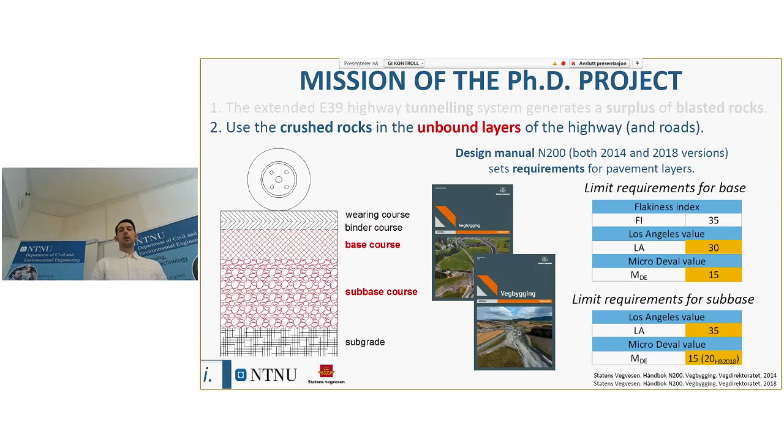As a preliminary stage to this research, it was important to understand and have an idea about the geology and which kind of rocks we can expect to find along the E39 trace alignment.

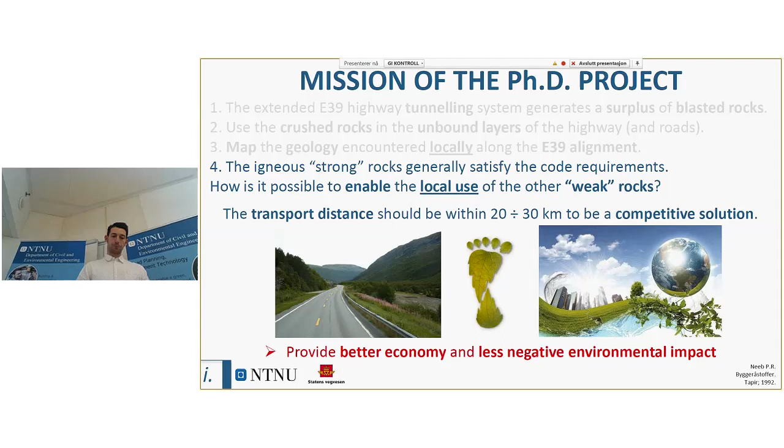So the basic question for our research has been how is it possible to use these weak rocks, and of course use them on a local basis, avoiding a transport distance, avoiding any excessive transport distance.

So now I would like to highlight, or remember, that when we are dealing with rocks, or also called 'pukk' directly in Norwegian, we need to keep in mind that we have two mechanical properties: the first is the stiffness, or resilient modulus, and the other is the deformation. Both stiffness and deformation are dependent on several parameters, the most important being the stress level and the water content, and afterwards the density, the grain size distribution curve, and the geology.

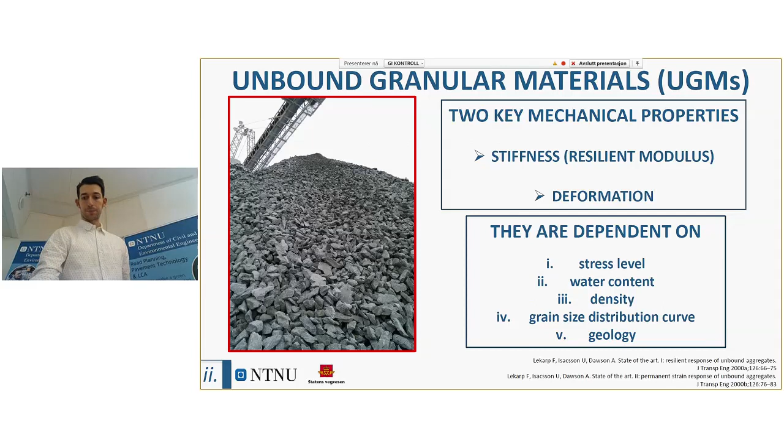So regarding our research, we have been considering this input. For the stress level, we have followed the stress path suggested by the European norm. Regarding water content, we have investigated two water contents: the first is 1%, and the other has been 5%, that is the optimum moisture content. For density, we have been using compacted samples, compacted for 30 seconds. The grain size is a distribution curve.

During the PhD, we have been studying a typical base layer, corresponding to this dashed line. And regarding the geology, we have collected 4 different types of rocks that lie along the E39 alignment.

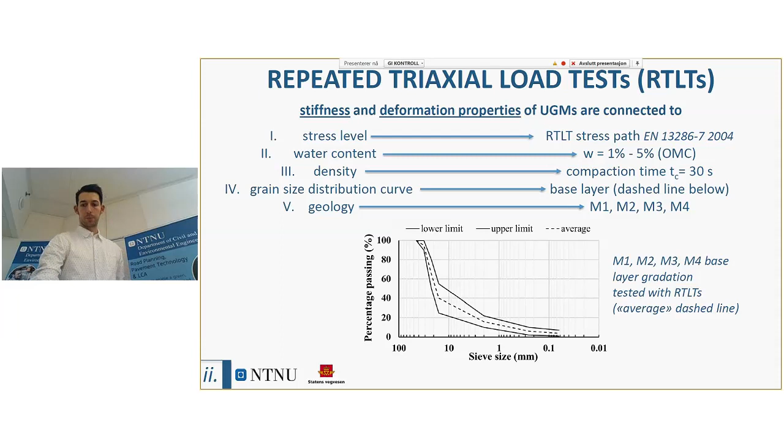So we have been doing several tests in the laboratory using the repeated triaxial load test apparatus. The key idea behind this apparatus is to provide our specimen with a stress level which is similar to the stress level likely to be encountered in real life during the real life of the road.

So the specimen is composed of our crushed rocks. The specimens have been compacted, then put inside the apparatus. There is a membrane that you can see here, and afterwards we fill this chamber with water, so that the water surrounds our specimen. What's more, we can adjust the pressure of this water, so that we can adjust the triaxial or surrounding pressure.

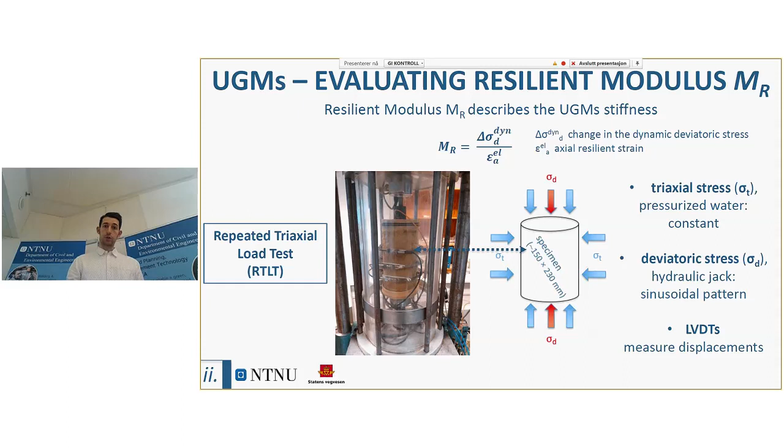As mentioned before, we have been following the stress paths suggested by this European norm. According to this stress procedure, called the multi-stage low stress procedure, we have been considering first and foremost 5 sequences of stress, that is to say of triaxial stress. Each sequence corresponds to an increasing value of triaxial stress, and this is why you can see 5 different colors here in this curve, so that every curve corresponds to a different triaxial stress.

In addition, for each sequence, it has been possible to adjust the deviatoric stress provided by the hydraulic jack, so that each sequence in turn is composed of 6 steps. This representation is actually equivalent to the table described before, that is to say, the stress paths provided by this European norm.

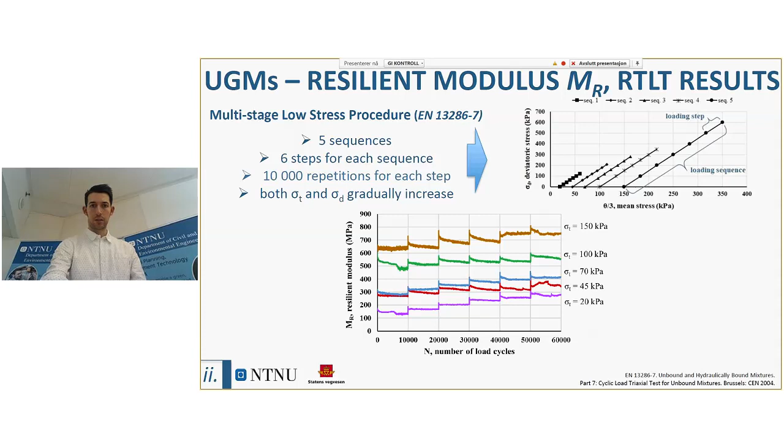Of course, we get a lot of experimental data out of this experiment, and we need to be aware that there are some models we can use to interpret the data, and here we can portray some of the most famous or most important.

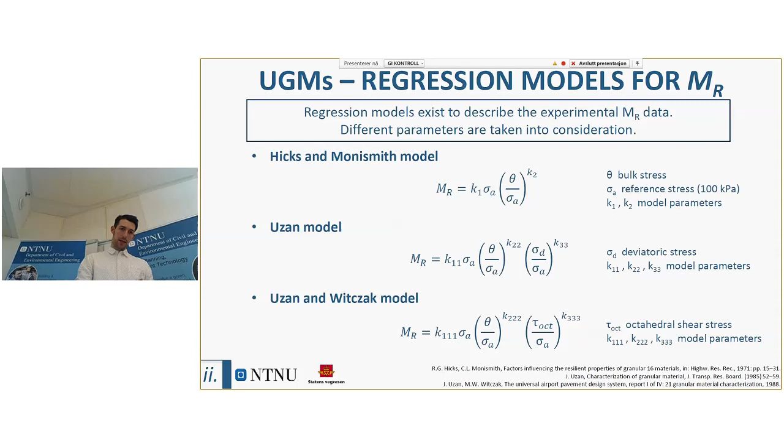The first one is the K-theta model, where we have a connection between the bulk stress and the resilient modulus. We also have other models like the Uzan model and the Uzan-Witczak model, other models establishing a connection between the stress levels and the resilient modulus. These models were developed some years ago, but they are really reliable when it comes to describing the experimental data in a good way.

The other important mechanical parameter I mentioned before is, of course, the deformation. As experiment engineers, our goal is to look for materials that have the best deformation properties, in the sense that the residual deformation, which is responsible for rutting problems, is as little as possible.

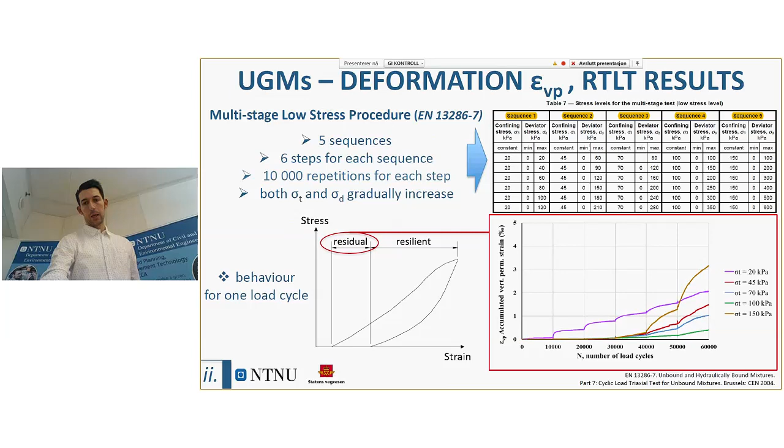And actually it is possible to understand these properties very well with the Tri-axial test as well, and we also have some models that we can use to interpret the data.

During our research, we have been considering the Coulomb model. The idea behind this model is actually simple: if the permanent strain rate is low enough, we are in an area that can be considered elastic. If the permanent strain rate is too big, or exceeds a threshold that we have defined, then we can consider ourselves to be in the failure zone. Otherwise, we are in a kind of middle zone, that is to say the elastoplastic zone.

Again, as pavement engineers, our goal is to keep the performance of the road in the elastic zone as much as possible.

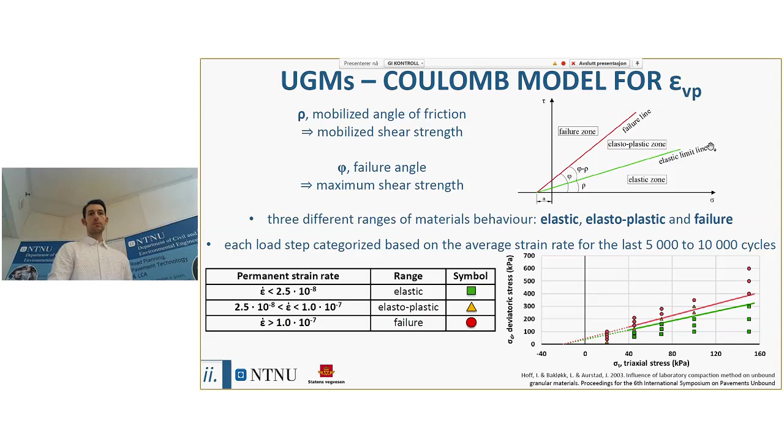As well as for the resilient modulus, we also had some models regarding permanent deformation. The first two, the Barksdale model and the Sweere model, establish a connection between the number of repetitions of the load provided by the vertical hydraulic jack and the permanent deformation. We also have other models, like the Hyde model and the Shenton model, which provide a connection between the stresses and the permanent deformation.

I would also like to mention that more complex models combining the number of load cycles and the stresses are available as well, but we haven't considered these models because the ones we used have been sufficient for us to investigate the crushed rocks and, what's more, to understand that the use of some additives, which I'm going to talk about later, has been effective.

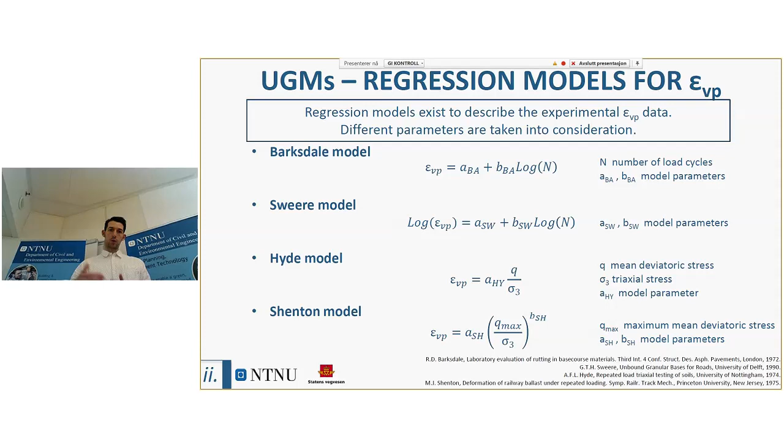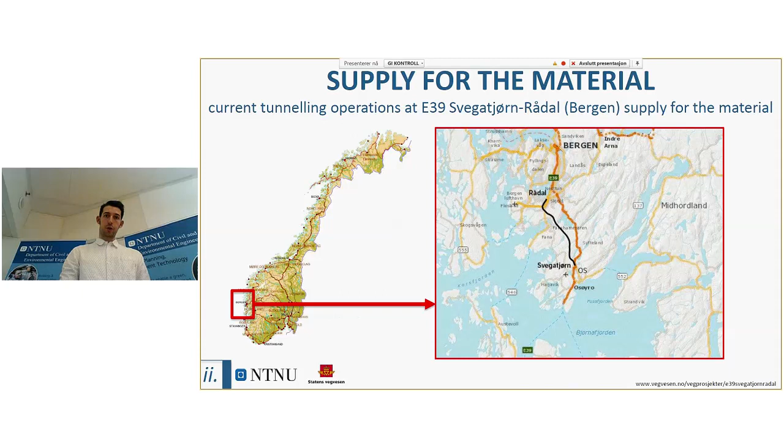So now let's move on and talk about how and where we got the materials we studied during our PhD. We went close to Bergen, to the Statens building site, and while we were there we collected three materials. Material M1 has an igneous origin, while materials M2 and M3 have a metamorphic origin.

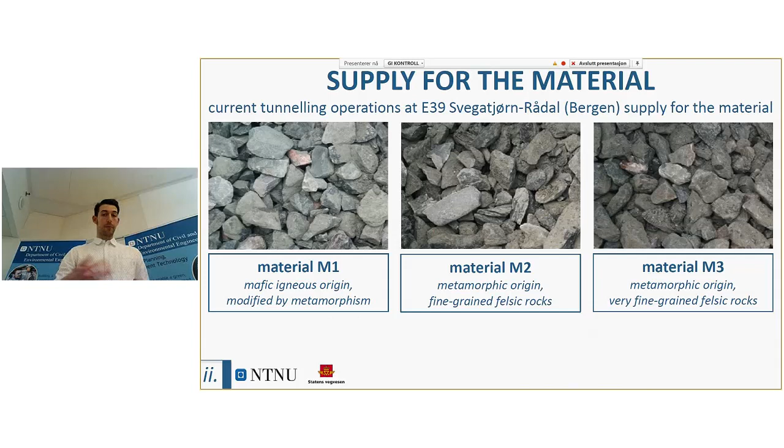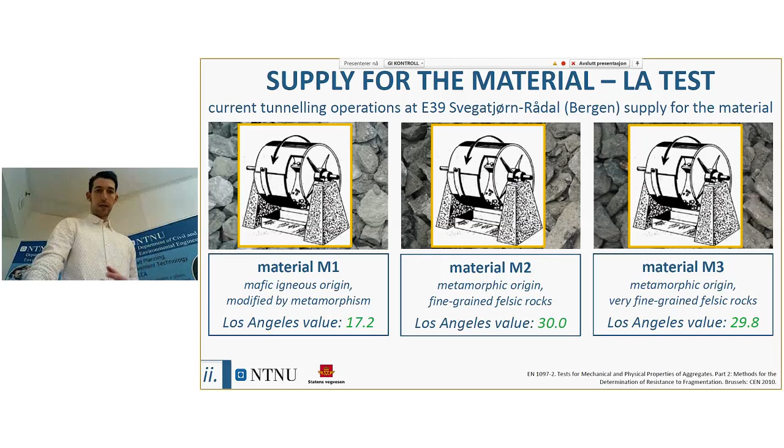The first thing we did was characterize them according to standard tests, that is to say the Los Angeles test and the micro-Deval test. As a result of these tests, we understood that material M1 was actually a good material, a strong rock that can be immediately used for pavement applications, while materials M2 and M3 are not strong enough.

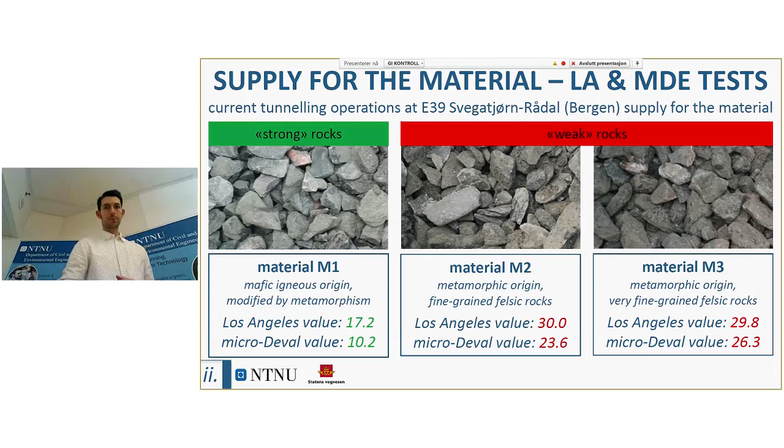So we need to find a way to improve the properties of materials M2 and M3 in order to enable their use in pavement construction. So our research question is: how is it possible to improve the properties of these weak rocks, which are not able to fulfill the code requirements?

So the first approach, quite simple from a conceptual point of view, is to mix the strong and the weak rocks, that is to say mix M1 and M2, or mix M1 and M3, and then see what kind of relationship we get. In this case, we got a clear linear relationship when mixing the strong and weak rocks, both regarding M1 and M2, and M1 and M3.

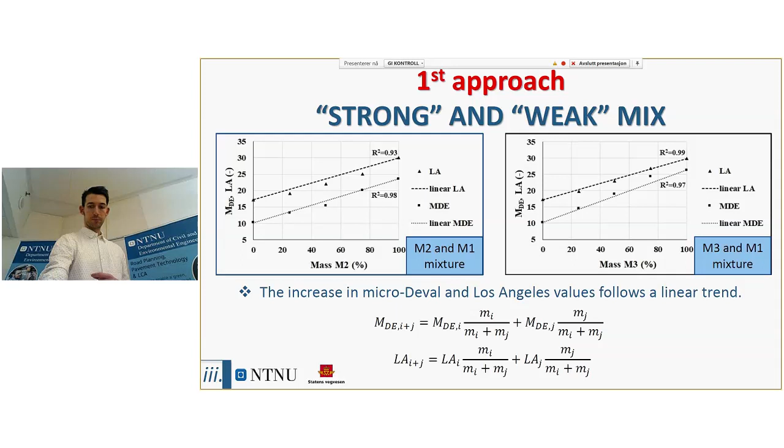Of course, the other way could be to use an additive. Today, when we talk about additives, we have some technologies already available, for example bitumen stabilization, lime stabilization, and cement stabilization, just to mention the most famous ones.

During our PhD, we have been investigating other resources, other additives that can be used, and these additives haven't been used that much, for sure in Norway, and anyway on a world basis. This is why it has been extremely interesting to investigate them. When it comes to these additives, the applications the literature pinpoints mainly refer to lime and silt. So applying, or studying the application of these additives to crushed rocks, is actually the novel content provided by this PhD research.

So let's start and describe the first additive that we used regarding the crushed rocks. The first one has been a polymer-based additive, and it is made of two components.

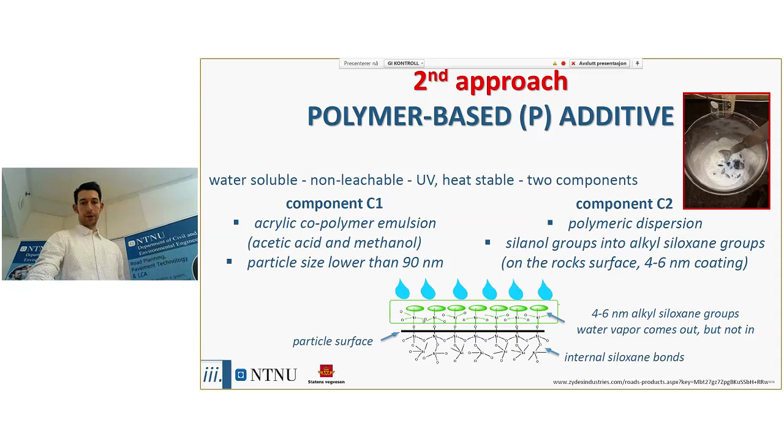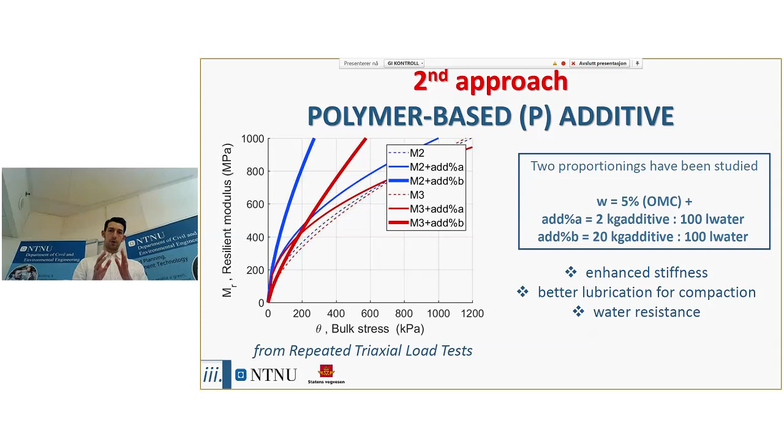So the first results in the laboratory confirmed that the use of this polymer-based additive was actually effective, and we also investigated the coating effect provided by the use of this additive.

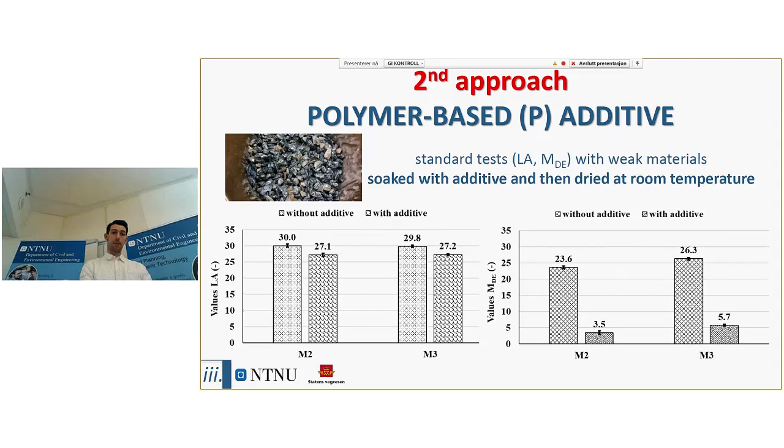We soaked the rocks with this additive and waited the necessary hours for the additive to properly bond on the surface, then we performed the standard tests, that is the Los Angeles test and the Micro-Deval test. As we can see from these pictures, it seems that these additives do have a beneficial coating effect.

The other additive we have been studying during the PhD project is the lignin-based additive. This additive is first and foremost a renewable product that comes from the paper industry. It is a non-toxic, non-corrosive polymer, and we need to remember that it is water-soluble, so we need to pay attention when using it.

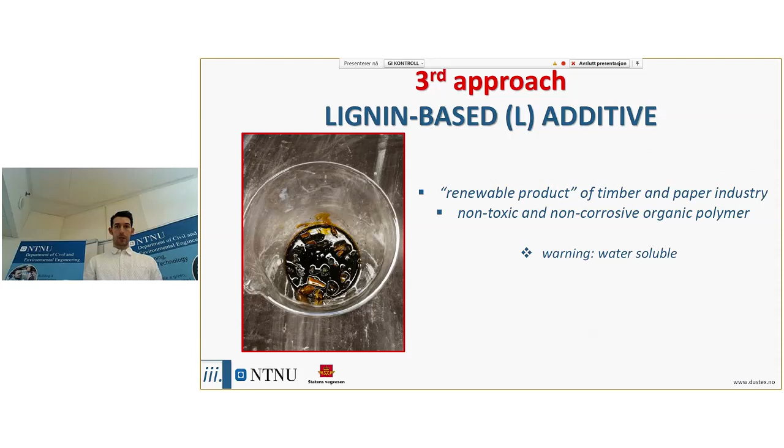Anyway, first and foremost, we made some preliminary investigations in the laboratory using the Tri-axial load test, and we could understand that the lignin-based additive had a beneficial effect, since the resilient modulus is higher here than the resilient modulus attaining to the rocks which were not treated.

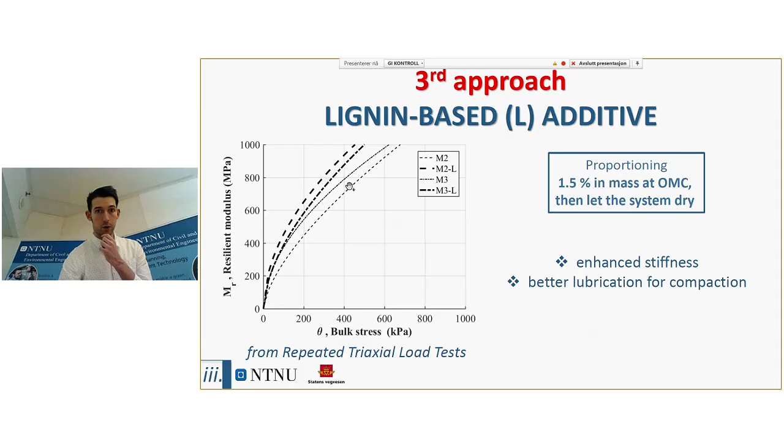Similarly to the previous case with the other additive, we also performed the standard tests, that is the Los Angeles test and the Micro-Deval test, after soaking the rocks with the lignin-based additive. The results are pretty clear: both the Los Angeles values and the Micro-Deval values decrease, so the additive does provide a beneficial coating effect.

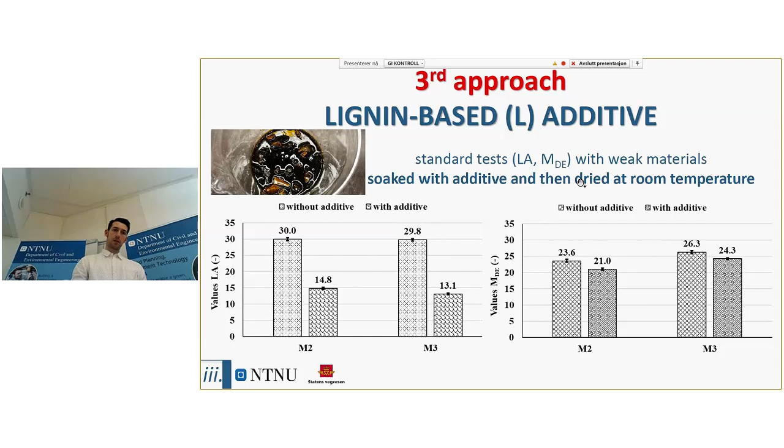As a further part of our PhD research, we wanted to make some modeling out of these experimental results. First and foremost, we tried to analyze and interpret this experimental data according to the models available in literature, the models I mentioned before.

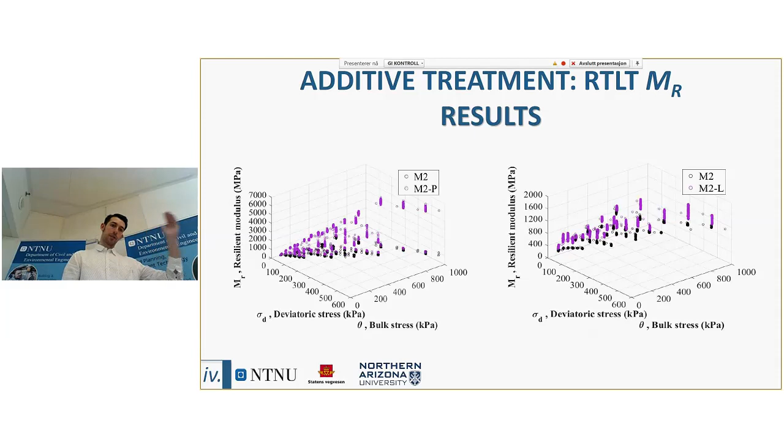Again, we can also plot these results in a 3D plot, and again the magenta colors, the resilient modulus corresponding to the treated materials, are actually higher than the resilient moduli connected to the untreated materials.

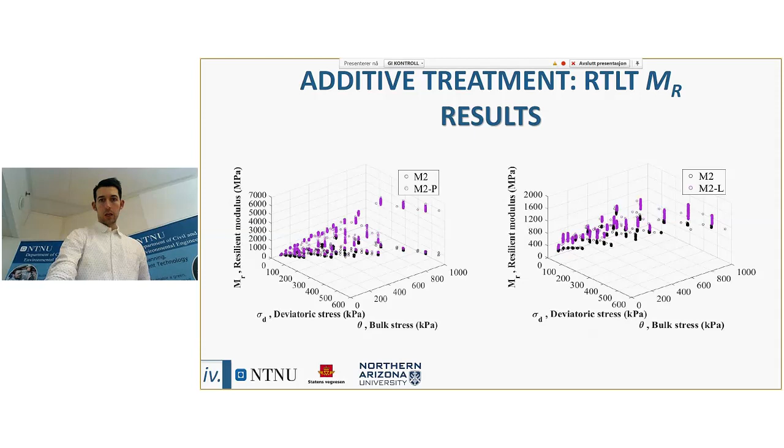As mentioned before, first we followed the Hicks-Monismith regression. Then we also displayed the results according to the Uzan model regression. Whether you're talking about a surface like the Uzan model, or a line like in the Hicks-Monismith model, it's always possible to see that the magenta color, the treated material, performs better than the untreated material.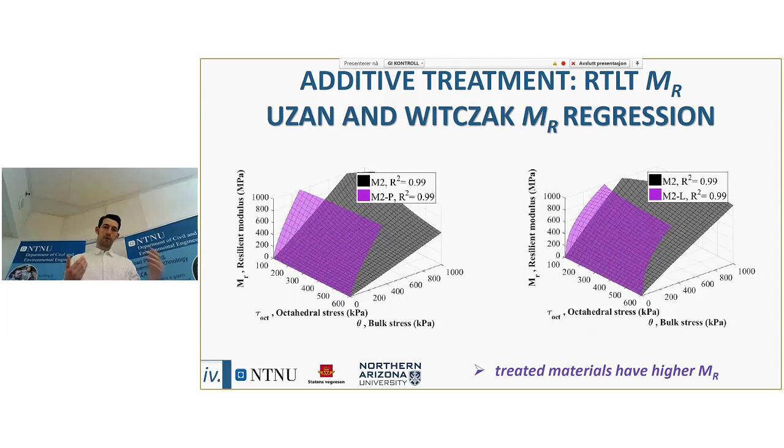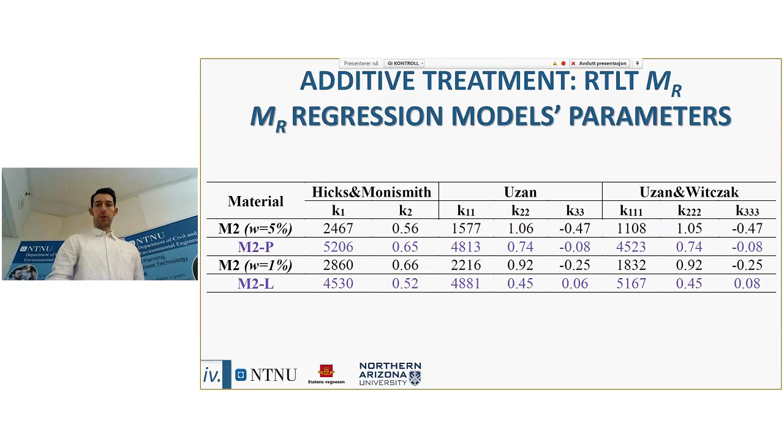Here we have some parameters just connected to the regression analysis. The other key mechanical property, as mentioned, is the permanent deformation.

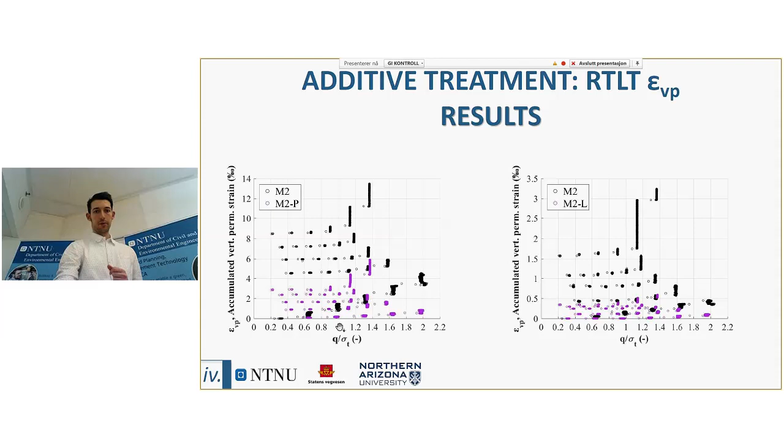Again, here first and foremost, we display the results coming from the experiments from the Tri-axial load test. Here we portray the same results, but with different values along the x-axis. For example, here we portray the ratio between the deviatoric stress and the Tri-axial stress, and here we portray the ratio between the maximum deviatoric stress and the Tri-axial stress.

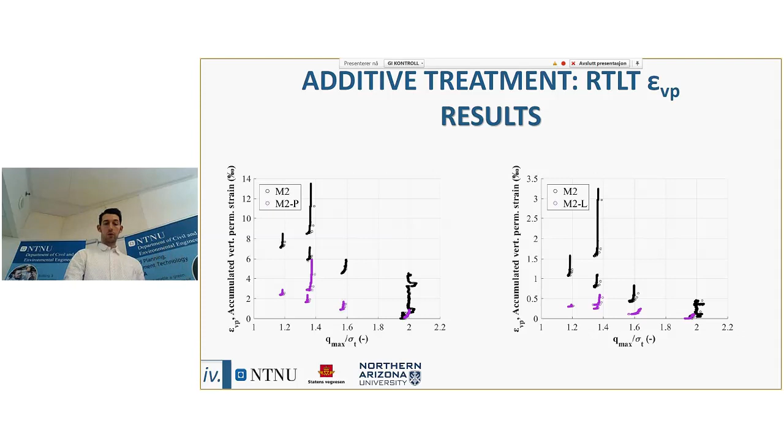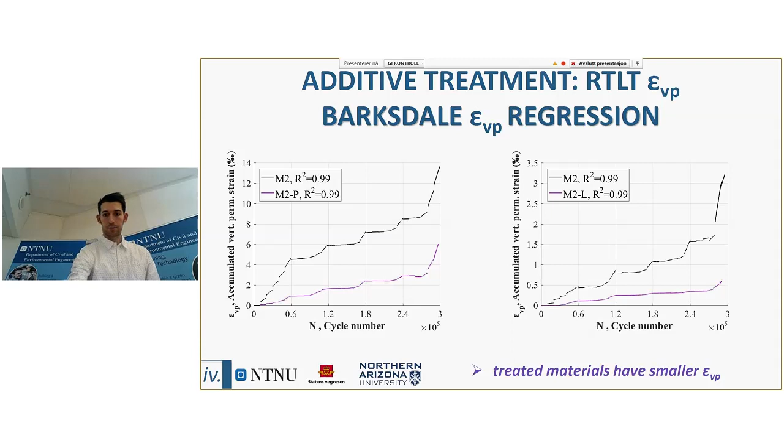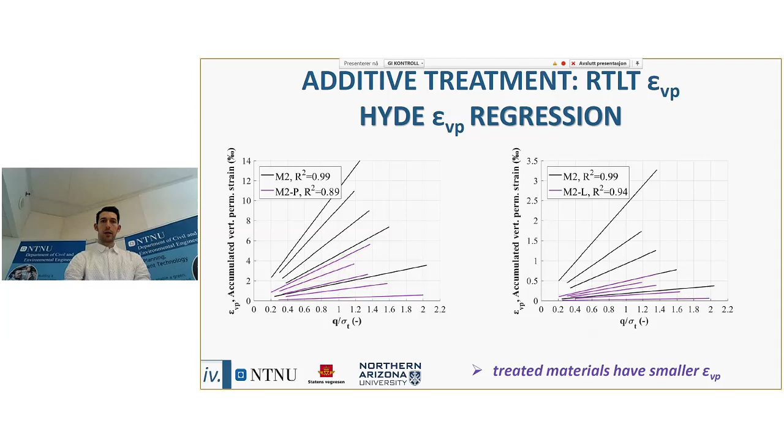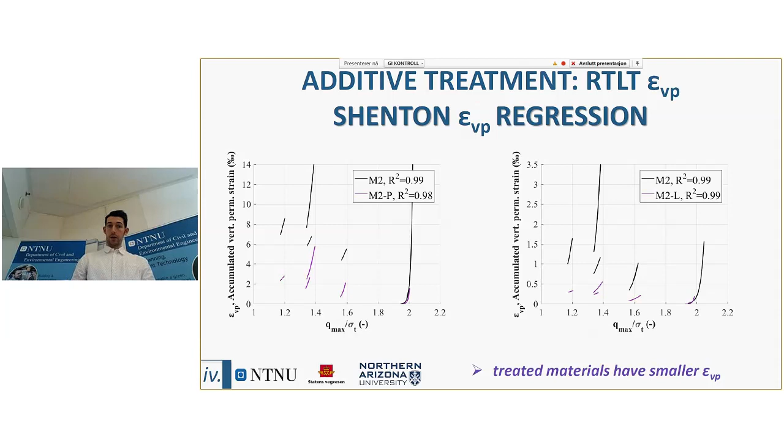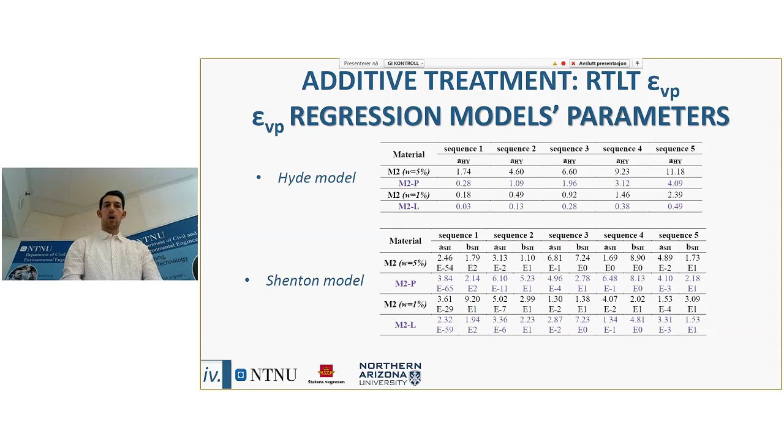Of course, as a next step, we wanted to see how it was possible to model the repeated triaxial load test. So we built a finite element model, and the geometry is simple because the specimen is just a cylinder. So the most demanding task was to implement the right constitutive relationship coming from the experimental data.

We considered the elastic part, and we also considered a plastic constitutive relationship, actually two plastic laws. One is Tresca, the other one was von Mises. And at the very end, we also considered a creep, kind of extra constitutive relationship. But we're going to talk about this soon.

So when we talk about plastic laws, we need to define first and foremost the initial yield stress, that is to say equal to the deviatoric stress, because since the beginning of the repeated triaxial load test, we always have both elastic and plastic deformation. And we also need to define the plastic tangent modulus, that was defined by plotting the results of the repeated triaxial load test.

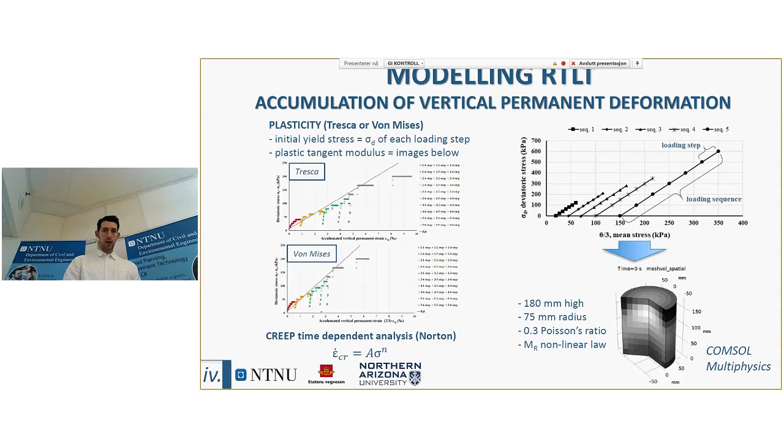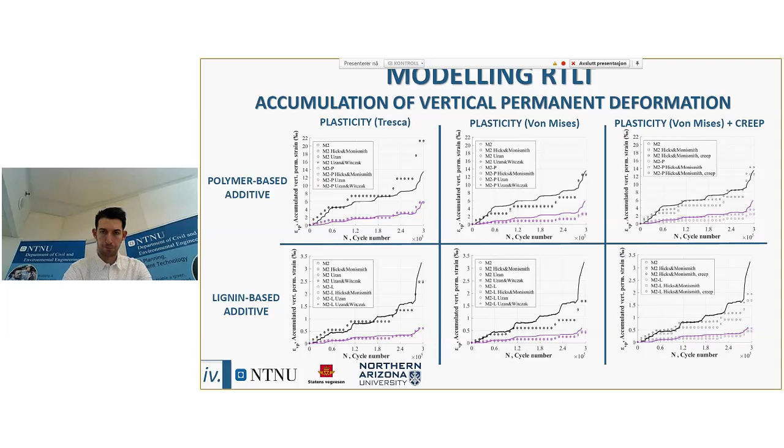As the last step of the PhD research, we wanted to investigate and assess the effectiveness of such additives in the field, because when we are dealing with new technologies or new solutions, we always need to be reminded that modeling is one thing, laboratory is another thing, and the field, the real life, is another thing.

By matching all of these three research contexts, we can actually understand the real use and the real value of what we are doing.

So in this case, we carried out this test starting from May 2018, in a quarry located close to Trondheim in Heimdal. The material available in this quarry is called, for convenience sake in this research, material M4, that is to say metagabbro with greenstone.

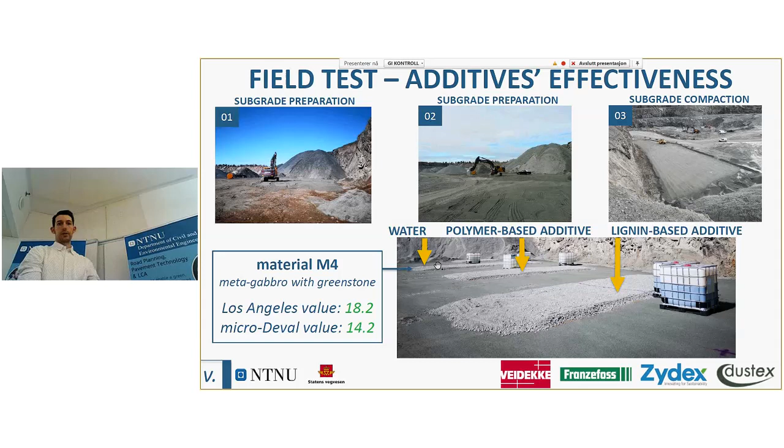So here we have the other pictures, which are able to let us understand better the main steps of the construction. So first we built our 15 centimeter layer. So of course we placed the material. Afterwards, we applied the water on all of these three areas, we applied the polymer-based additive on one area, and we applied the lignin-based additive on the third area. We mixed all this water, additive, and rocks together properly, thanks to the action of a proper mixing tractor, and afterwards we proceeded with the compaction.

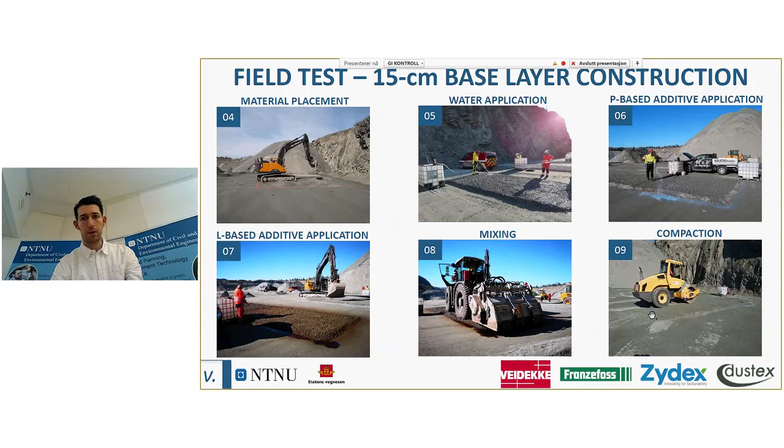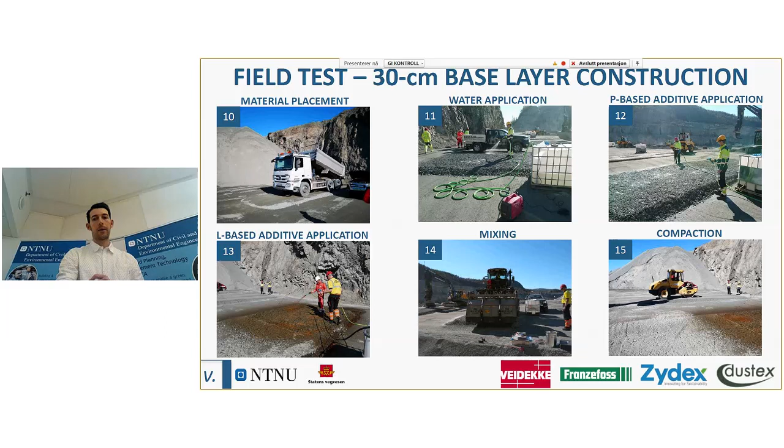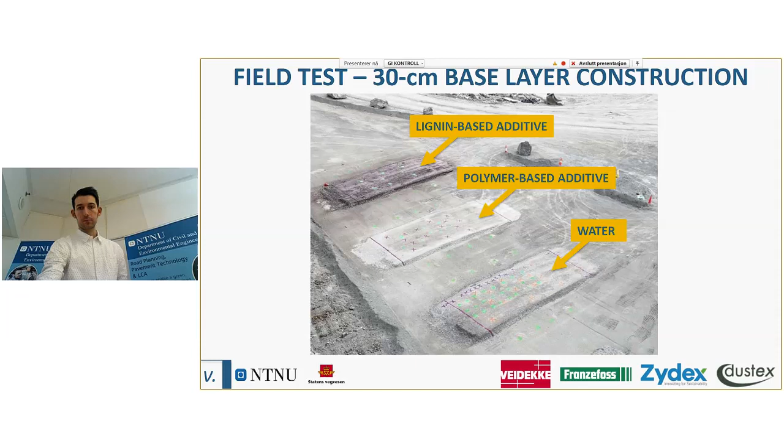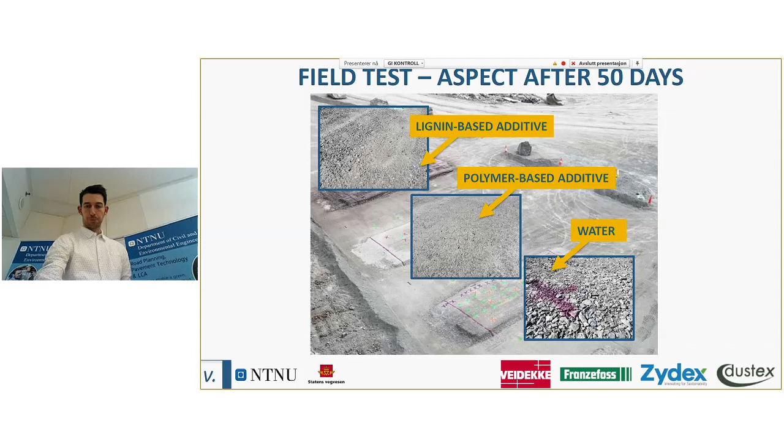This is the aspect after 50 days. We can see that when it comes to the water area, the rocks are still kind of there, unbounded materials. But when it comes to the polymer-based additive and the lignin-based additive, we can see just by sight that there is a binding action. But of course we need to assess the results from a scientific point of view, from an objective point of view.

So we carried out some daily measurements with a lightweight deflectometer. The idea behind the lightweight deflectometer is to assess the deflection which a plate undergoes when it is hit by a falling mass. This is a device that can be easily used by a single person, and it is connected to the most traditional device, that is to say the falling weight deflectometer. This device is different mainly in the sense that the investigated depth is lower, because the impulse load generated is smaller than that of the falling weight deflectometer. But still, for understanding the properties of this 30 centimeter layer, this was a very good way to do that.

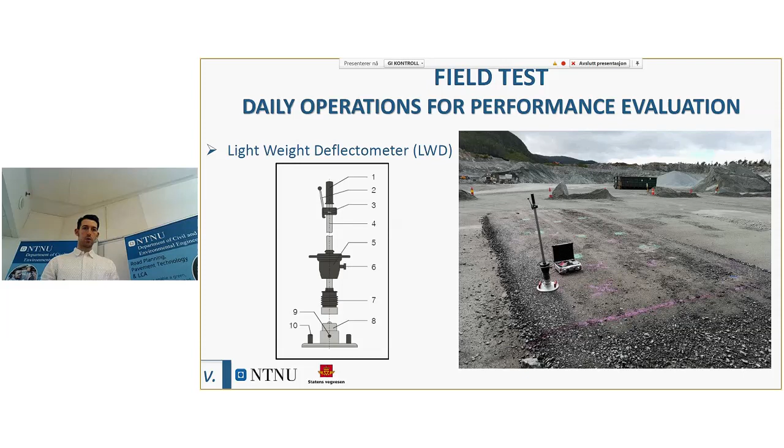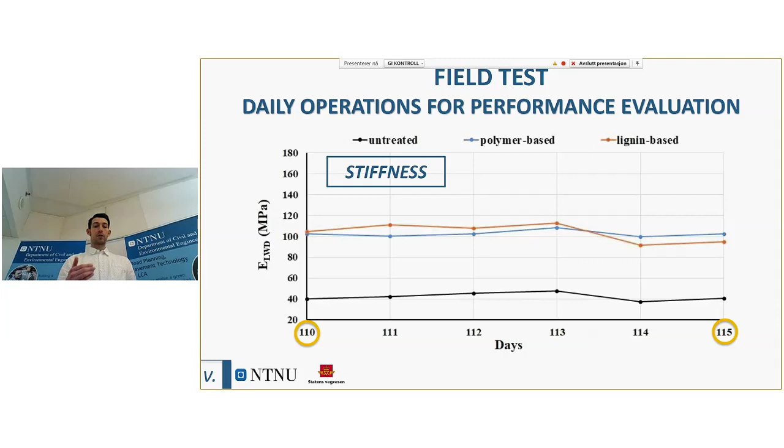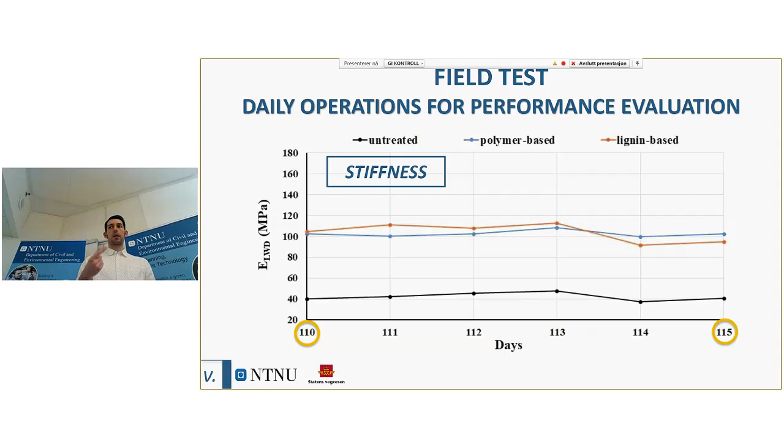But anyway, we repeated these measurements after almost 4 months, that is to say in September, so 110 days after the construction, and we saw that the stiffness of both the lignin-based additive and the polymer-based additive was pretty much similar, and much higher than the stiffness of the untreated material. So it seems like the lignin-based additive needs some time to become effective, and we always need to bear in mind that we didn't have any bitumen layer on top, so there was no coating effect provided by the bitumen to the lignin, so the lignin was exposed to natural rainfall.

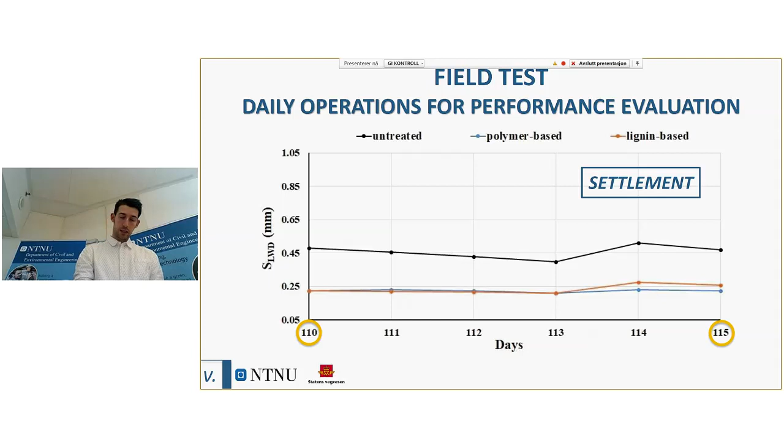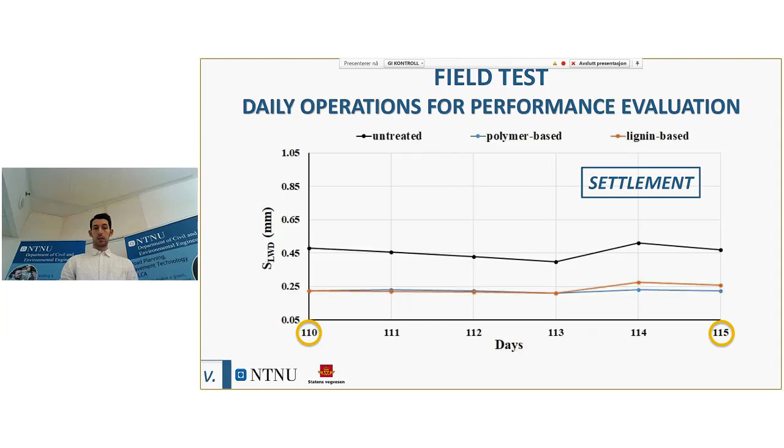Of course, we also have different or simpler methods to assess the validity, the effectiveness of such additives. The first one, for example, was to use the dynamic cone penetrometer, the DCP, and the way of using this device is simple. We just have a vertical rod. The conic end is placed on the top of our layer, and then there is a falling mass, just falling down and hitting the cone, so that the cone end can penetrate down in our base layer.

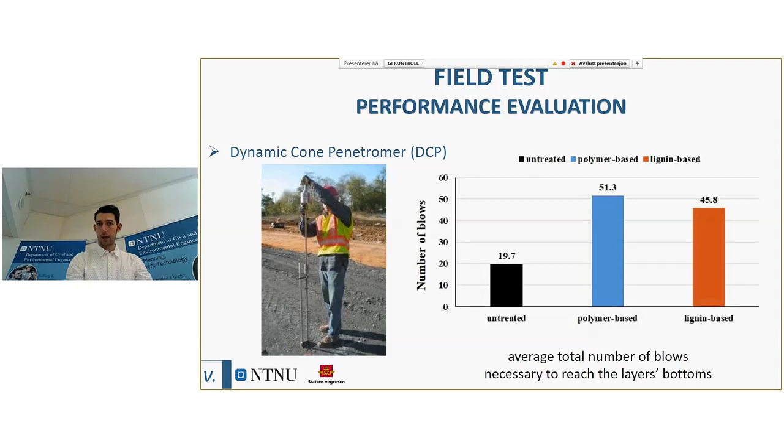And this similar graph portrays the number of blows which was necessary to reach the end of each one of the three areas. For the untreated area, almost 20 blows were sufficient. But then we needed almost 50 blows for the polymer-based layer to reach the bottom, and almost 46 for the lignin-based additive.

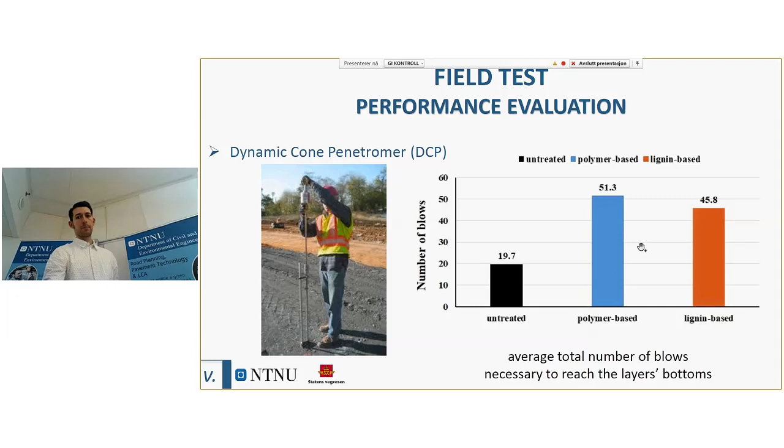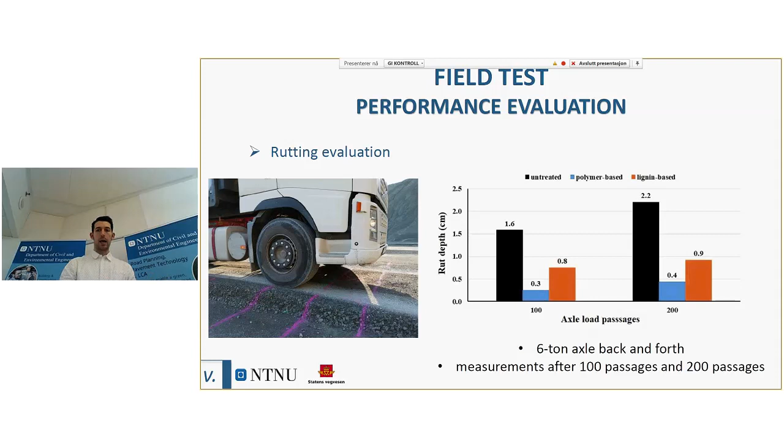Finally, we also decided to evaluate the rutting properties, assess the ruts, which it was possible to create by driving a 6-ton axle back and forth on each of these 3 areas. We drove this truck first 100 times, and here we have the results. Furthermore, we drove it back and forth again 200 times. So when it comes to rutting, it is very clear that again the untreated material does not perform really well. It's the worst one compared to both the lignin and polymer-based additive.

So now we made some conclusions out of the PhD work. The alignment comprises a lot of geological conditions, a lot of rock types. Some of the strong ones fulfill the code requirements, while other ones do not. We have been investigating whether additives could improve the properties of the crushed rocks, and we have been studying 2 additives. One was a polymer-based additive, another one was a lignin-based additive. The polymer-based one had a rapid effect. It even creates an impermeable layer. So it turned out to be effective.

The lignin-based additive turned out to be effective as well, but it needs time to become effective, and it is water soluble. So we need to pay attention and consider carefully the application of this additive. For example, we can first use this additive during a week when there is no precipitation, and afterwards directly use a bitumen layer to cover the base layer, so that the water cannot penetrate and worsen the performance of the layer where we are using the lignin-based additive.

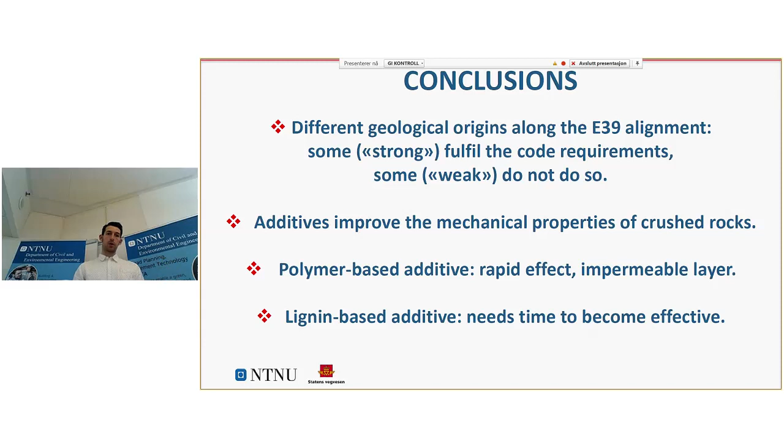We can also consider some inputs for future research. First, we have been considering four rock types during the PhD project. It could be possible to consider even more rock types to generalize the results that we got during this PhD research. The other interesting point is to test different additive mix percentages, because during the PhD research we have been investigating two mixing proportions, but in real life, to use these additives in the most proper way, we strive to look for the optimum content of this additive.